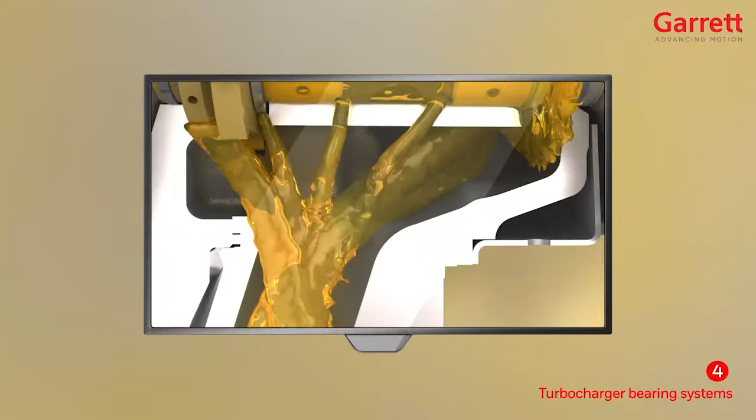Turbocharger bearing systems are split into two main families: hydrodynamic bearings and ball bearings. In the previous training course, we saw how the oil flows through a normal hydrodynamic bearing system. We will now study in detail the two subfamilies of hydrodynamic bearing systems.

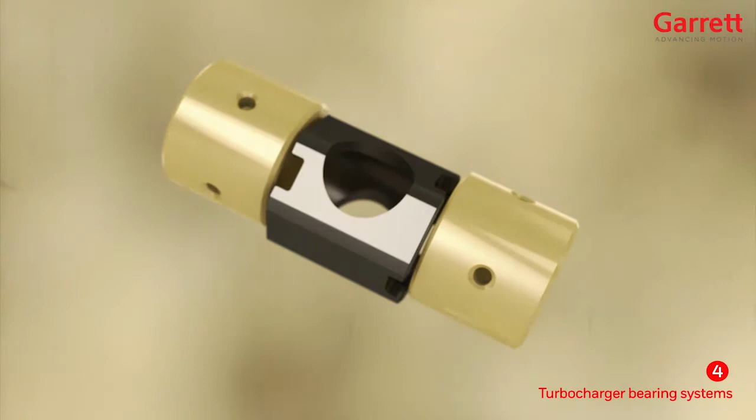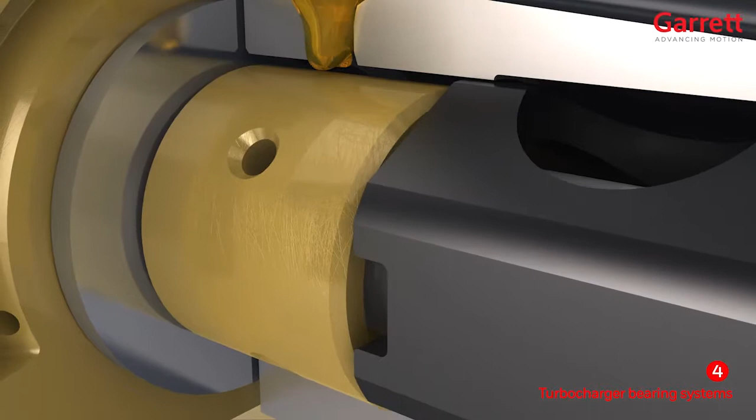Firstly, the fully floating bearing system has been used since Garrett turbos began production in the 1950s and are still widely used today. This uses two bearings with two oil films: an outer oil film between the bearing and center housing, which provides both stiffness and damping to control the motion of the rotor assembly and reduce the transmission of vibration and noise.

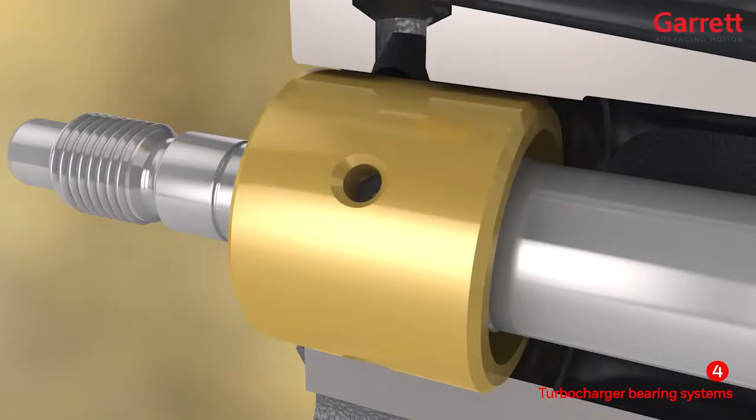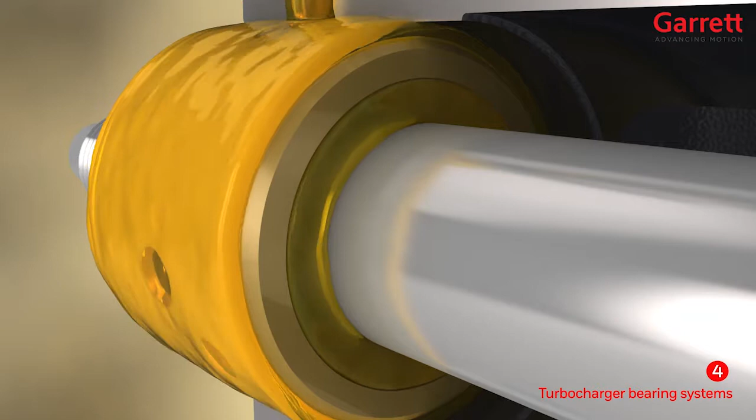The oil also passes through feed holes in the bearings themselves to provide an oil film between the bearing and the shaft. Due to the rotation of the shaft, the viscous oil is dragged in the direction of rotation, which also drags the bearing in the direction of rotation. So, the fully floating bearings rotate within the housing at around half the speed of the shaft.

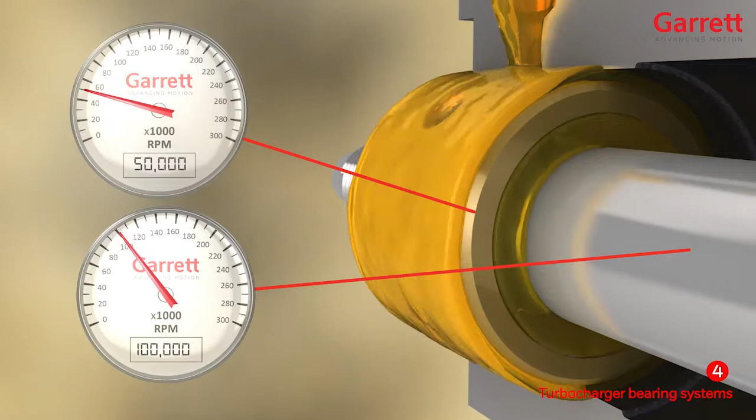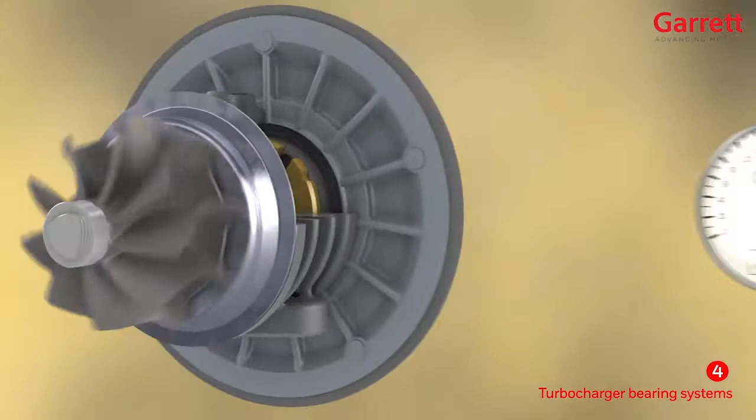Secondly, the semi-floating bearing system. This design is preferred for our smaller, higher-speed turbos, which may rotate at over 300,000 RPM. These also have two oil films, but are prevented from rotating by an anti-rotation pin or locating pin. The outer oil film in this case is only providing damping.

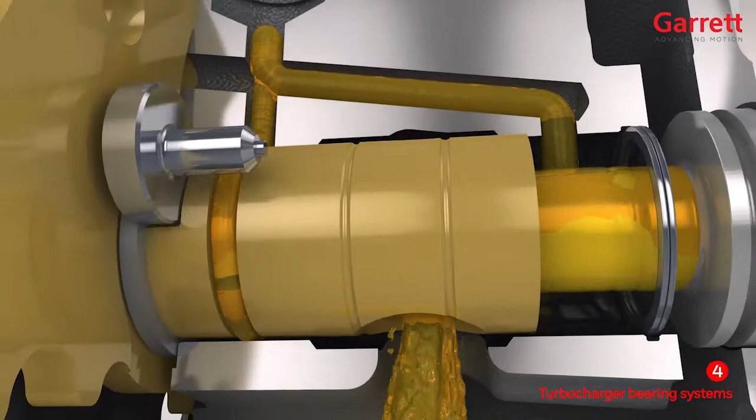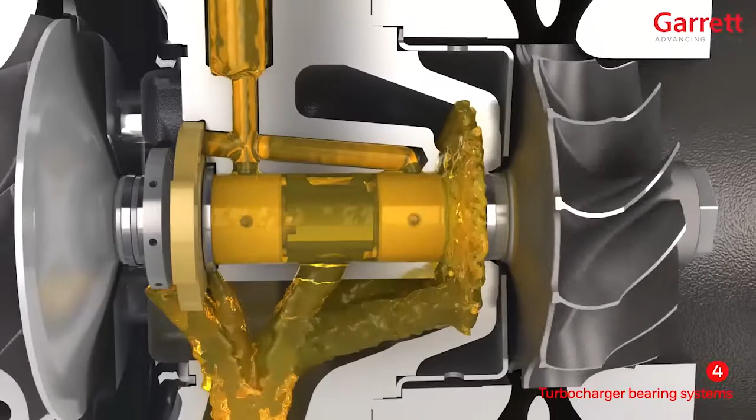Some of the oil passes through feed holes in the bearing and flows between the bearing and shaft. It is this inner oil film which provides the hydrodynamic support to the rotor assembly. The oil has the most important job to do inside the turbo, to support the high-speed rotor assembly and prevent contact between the wheels and housings.

The movement of the rotor assembly is complex, and the constantly changing load on both turbine and compressor ends means that the oil must work hard. Therefore, high-quality oil is essential for the turbo.

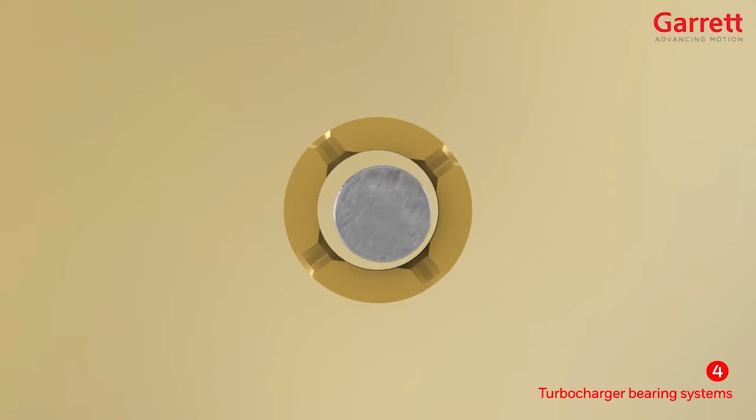Viewing a section through a bearing system, notice that the shaft is not running exactly in the center, but due to the load, it is off-center and low. As the oil is dragged in the direction of rotation, it passes into a gradually reducing section, squeezing the oil hard and creating a wedge shape of very high pressure oil towards the bottom of the bearing system.

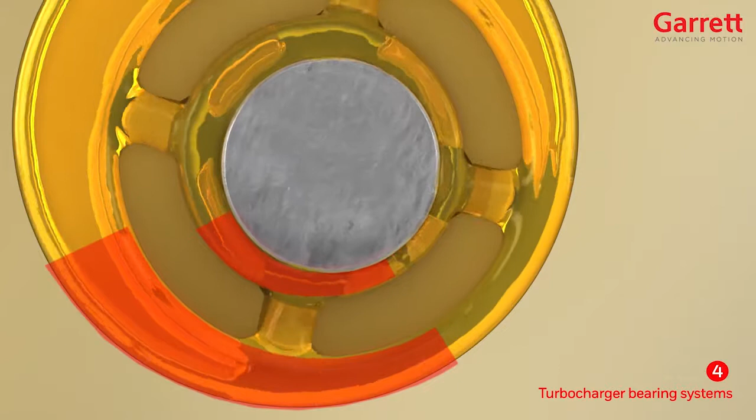The red shows the distribution of pressure which is generated within the system. This high pressure oil film prevents the parts from coming into contact and controls the motion of the rotor assembly, avoiding any wheel-to-housing contact. When running at full load, the clearance between the shaft and the bearing are filled by an oil film which may be as thin as 7 microns, which is why clean oil is critically important to the operation and life of the turbo.

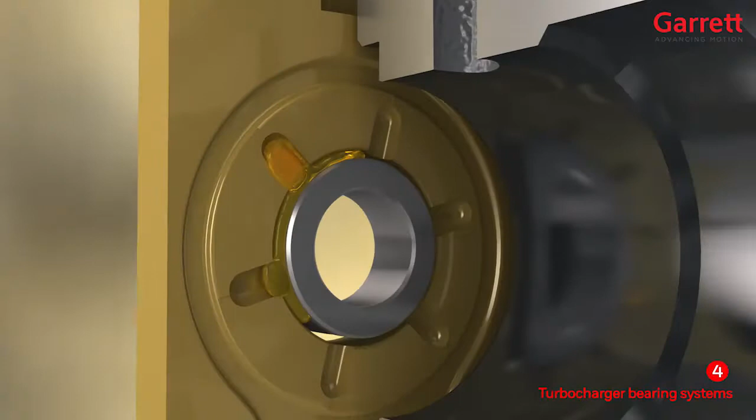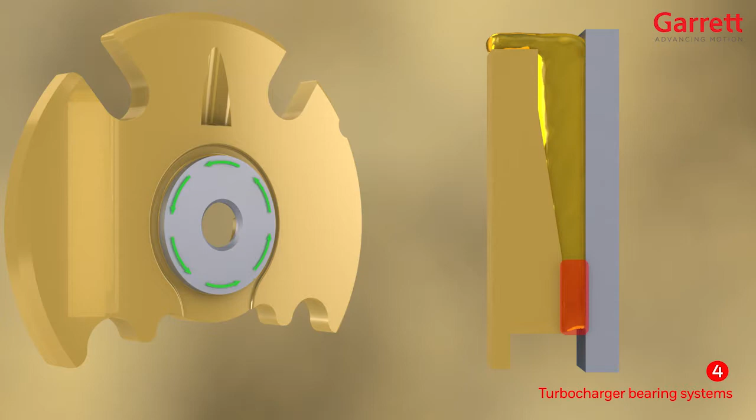The oil also feeds the thrust bearing assembly, which controls the axial motion of the rotor, flowing through feed holes in the thrust bearing to each thrust pad on both inboard and outboard sides of the bearing. The oil is dragged in the direction of rotation across each thrust pad, which has an angled ramp with a reducing wedge-shaped section, squeezing the oil hard and creating an area of high-pressure oil at the trailing edge of the thrust pad.

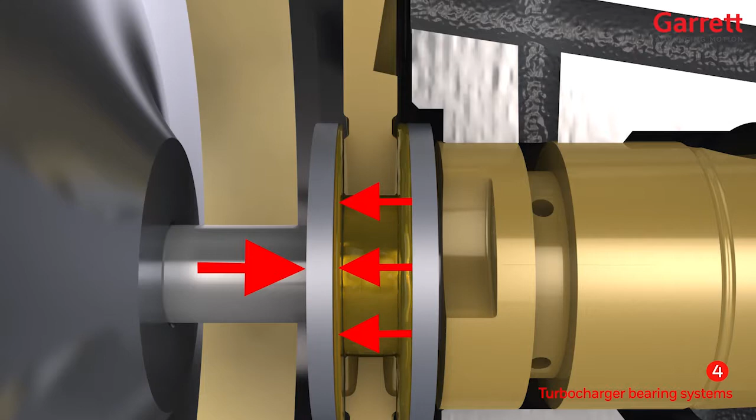This occurs on both sides of the thrust bearing, and as the load from the turbine or compressor varies, the oil compensates for this. As it is squeezed harder, the oil pressure increases and pushes back against the load. The thrust bearing system compensates for these constantly changing loads automatically up to its designed limit.

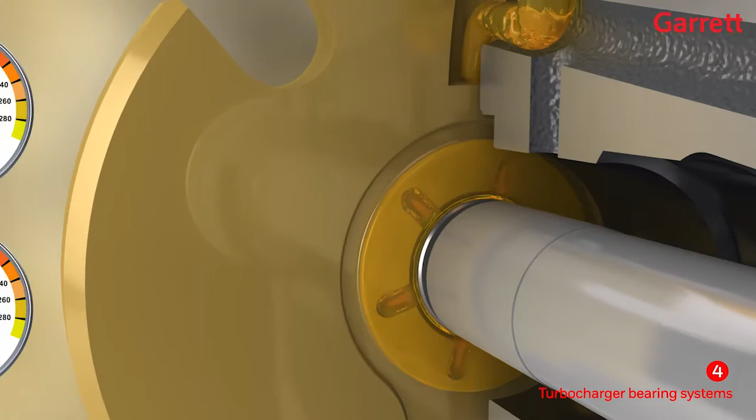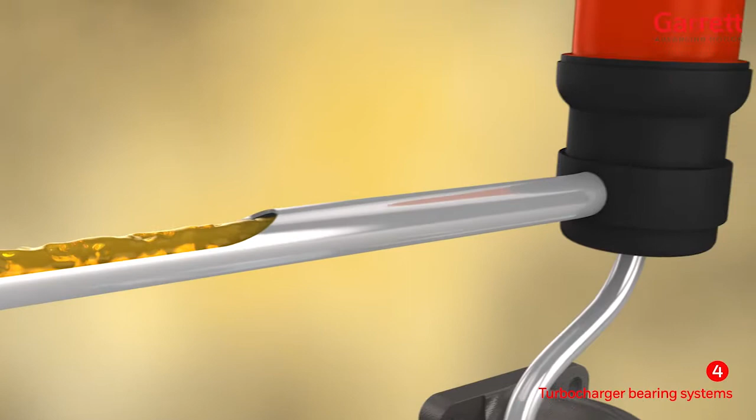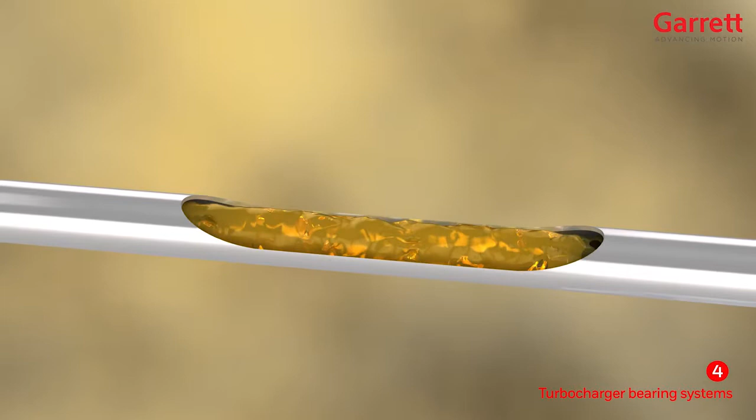The oil is working extremely hard in the thrust assembly, and under full load conditions, the oil temperature can increase by as much as 50 degrees Celsius as it travels just a few millimeters across each thrust pad. With such extreme demands on the bearing system, using the correct grade and type of well-filtered oil is critical to correct operation and a long operating life. The oil must also be changed at the recommended interval, along with a new OE quality oil filter.

Failing to comply with these basic requirements brings a high risk of turbo damage from the single biggest killer of turbos, contaminated oil.

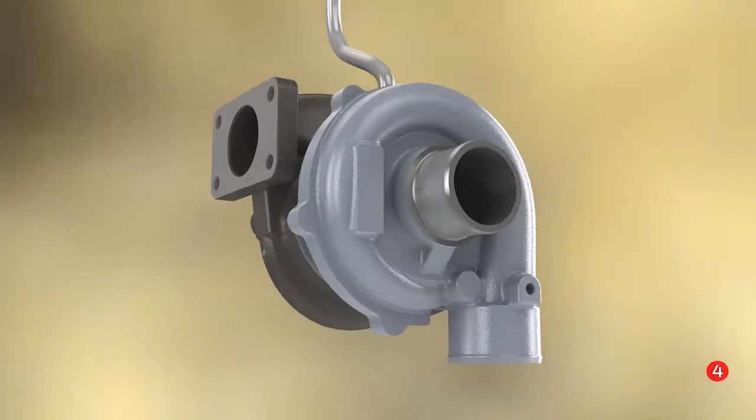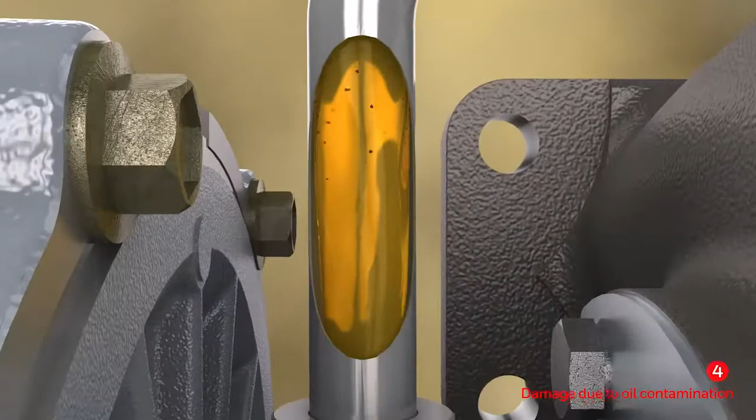There are many types of contamination which may be carried by the engine oil into the turbo bearing system and cause damage. The most common are fine particles, usually carbon from the combustion process. And if the concentration of these particles becomes too high, it acts as a very effective abrasive.

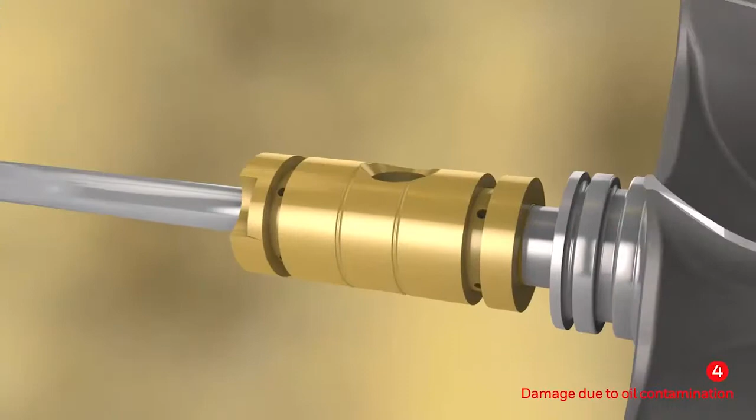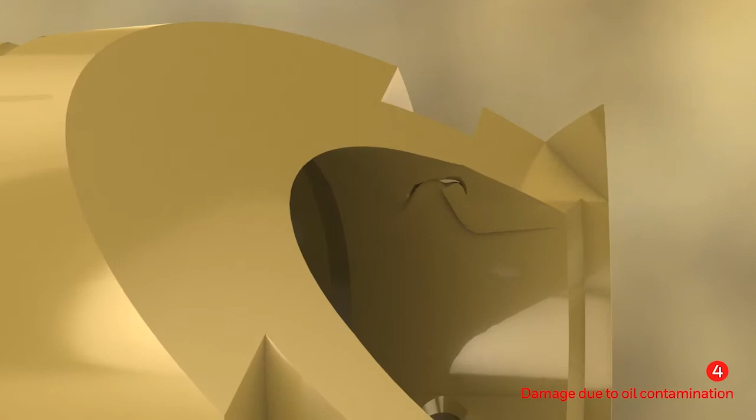Gradually eroding and polishing the running surfaces of the bearing and shaft, increasing the clearances, and opening up the oil feed holes until the oil is no longer able to control the shaft. This is usually accompanied by a sharp increase in noise level and oil leaking past the turbine end seal, causing oil to be burned and noticeable exhaust smoke.

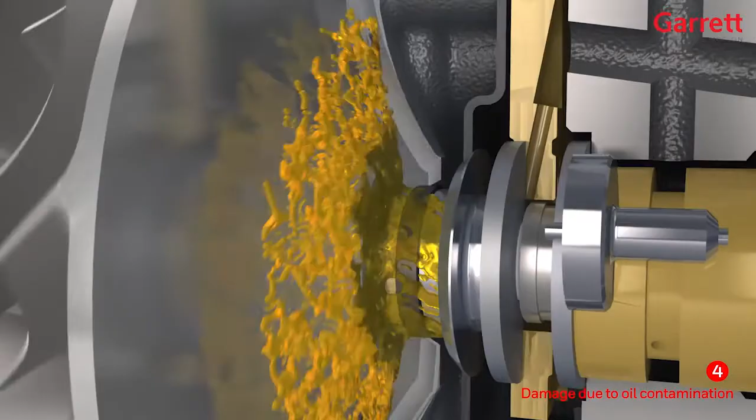Oil may also leak past the compressor end seal and be blown into the compressor outlet pipework and charge air cooler. By the time this happens, the remaining life of the turbo may be extremely short because metal-to-metal contact will occur between the shaft, bearing, and housing, quickly followed by the turbine and compressor wheels contacting and rubbing on their housings. This causes wheel imbalance, leading to the shaft bending and often followed by fracture of the shaft.

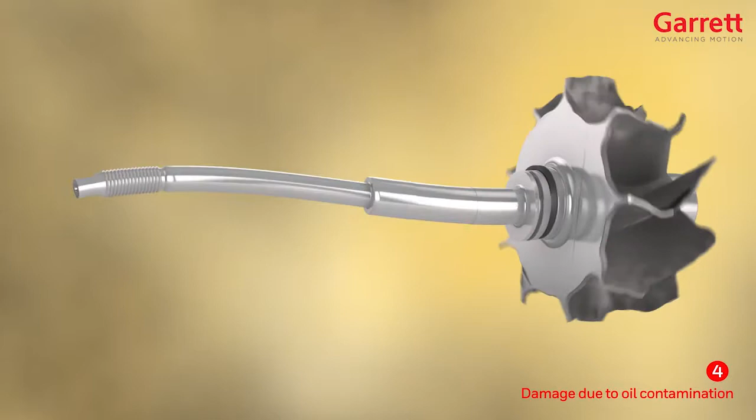Catastrophic damage of this sort may lead to fragments of wheel passing into the air pipework, charge air cooler, and exhaust systems of the vehicle.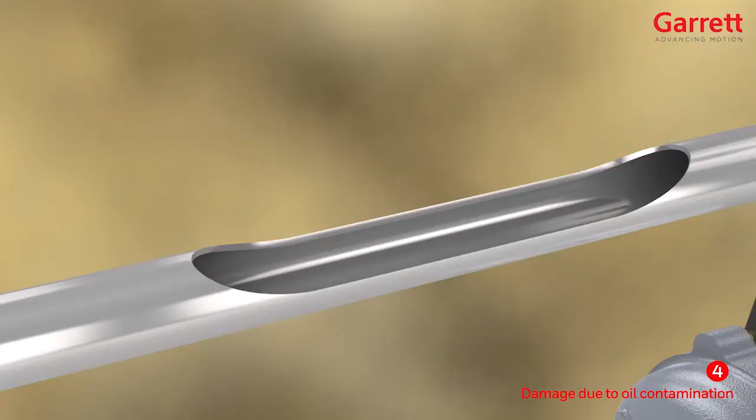Contaminated oil may also contain large particles, for example, fragments of metals from worn engine components, or even steel shot used for cleaning at engine overhauls. These should be trapped by an effective OE quality oil filter.

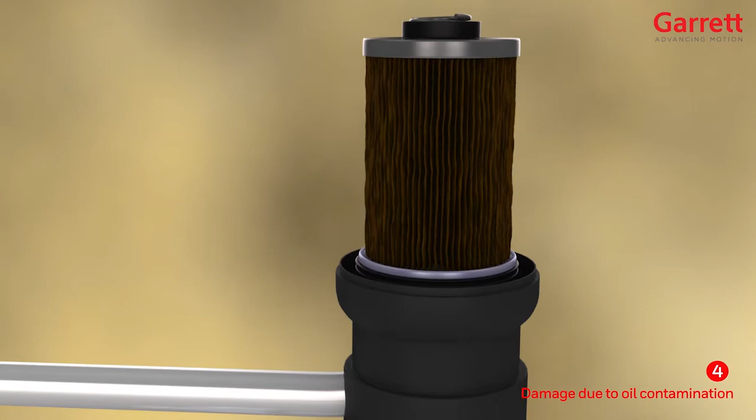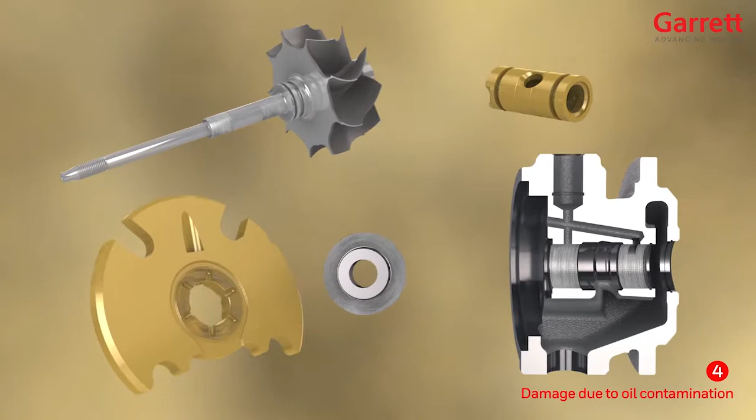But if the filter is of poor quality or is blocked and bypassing, these fragments may find their way into the turbo bearing system. Typically, this causes deep, irregular scoring to any or all of the following: shaft, bearings, housing, thrust pads, thrust collar and spacer.

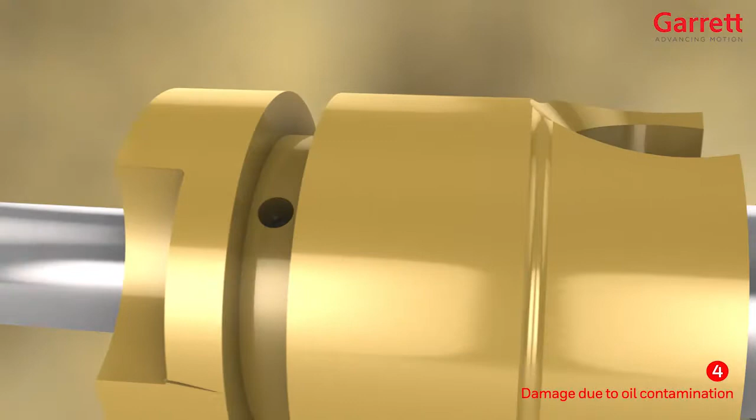Scoring of the hard steel shaft cannot be caused purely by contact with the journal bearing, which is made from a much softer bronze material. So a scored shaft generally indicates contamination, with hard particles being carried in the oil.

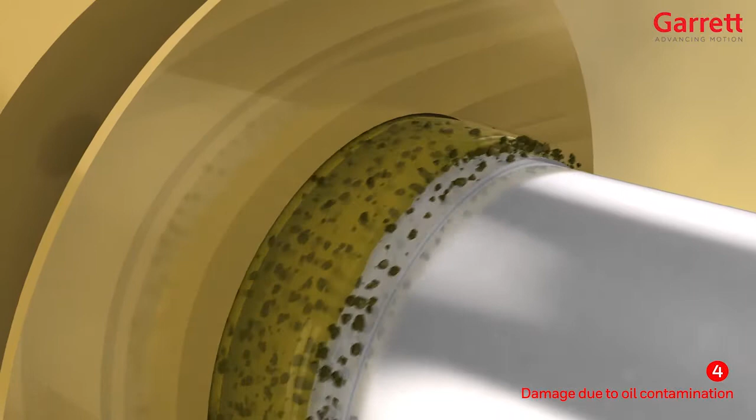This scoring prevents the oil in the bearings from functioning correctly, and metal-to-metal contact occurs, followed by the same sequence of catastrophic damage seen previously.

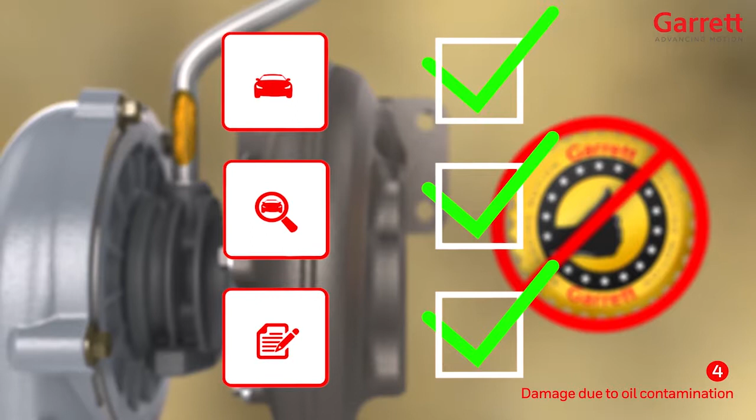Our turbocharger warranty does not cover damage due to contaminated oil, which is mostly entirely preventable. Always check for any OE manufacturer's service bulletins relating to known problems with oil contamination for specific engines and vehicles and rectify the root cause.

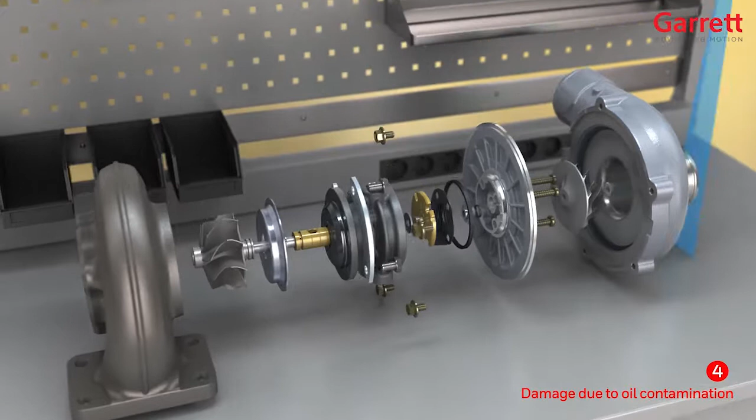The root cause of damage to a turbo must be accurately diagnosed before fitting a replacement, or this may become damaged in the same way. The easy way to ensure that a new Garrett turbo will continue performing to OE standards throughout a long service life is to ensure that it always has top quality clean oil of the correct grade running through it.